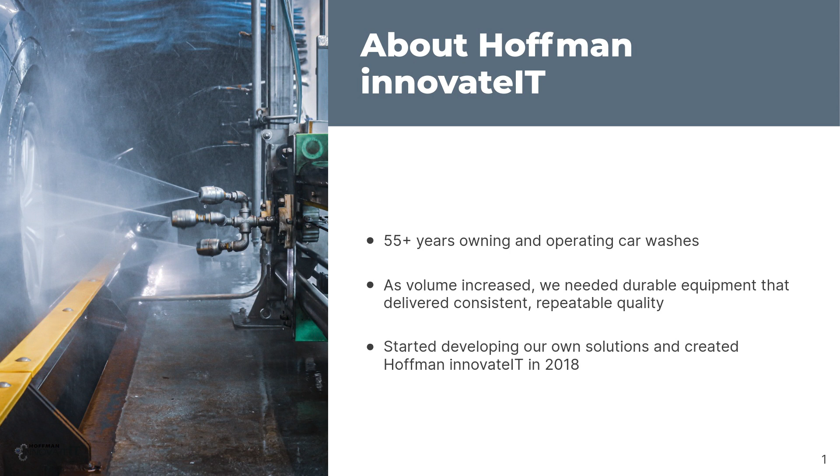With that said, I'll hand things over to Gavin, who will now take you through reclaim systems and some of the benefits and features of our reclaim system as well. Gavin, the floor is yours. Sure. First of all, just to reiterate, thanks for everybody joining here. So hopefully we'll all learn something together and point in the right direction on reclaim usage.

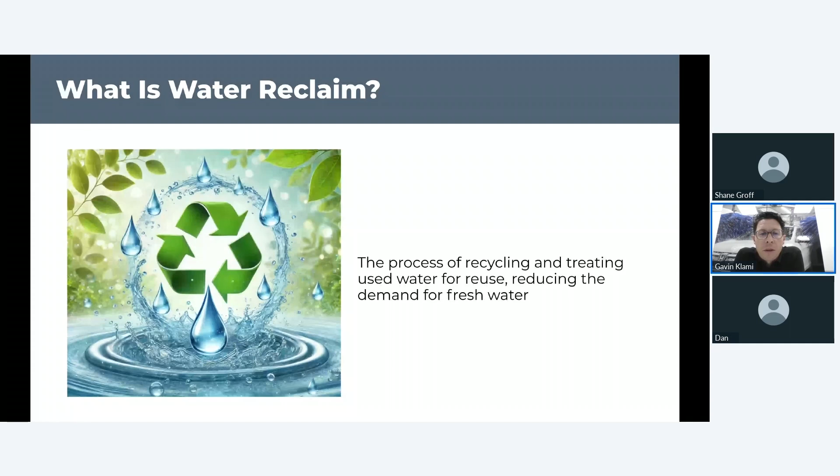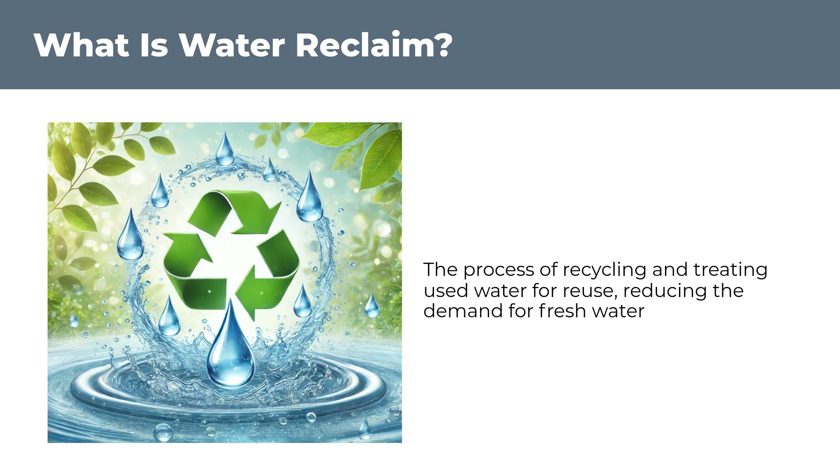So very basic fundamentals. What is reclaim water? Ultimately, treating and prepping used water within your car wash to be able to be used again somewhere else in your wash operations. So there's multiple things that go into that. We'll step through the equipment, how it actually functions, but on a very fundamental level, it's recycling your used wastewater. Instead of sending it all down the sewer, we're going to reclaim some of that, send it back to the car wash. Core reasons why we're looking to reclaim water in your wash.

Sustainability, obviously, that's something that's more and more on the front of everybody's minds, both operators and your customers as well. Depending on your municipality or location, that might be a more forced objective for you. But either way, it's something that really is coming to the forefront in all car wash operations. Obviously, water usage is a huge driver in the car wash world, so trying to minimize that is better for everyone. So sustainability, using less water is really the name of the game there.

Ultimately, from a business operation standpoint, we're looking to save you money. At the end of the day, this is a business. You're all running your businesses in a way to satisfy your customers, but also to maximize your own profits within that organization. And part of that is to cut down on your costs, cut down on the materials required to produce a high quality wash for your customers, and ultimately put some savings in your pocket, in your business, to be reinvested and ultimately serve your customers in a better way.

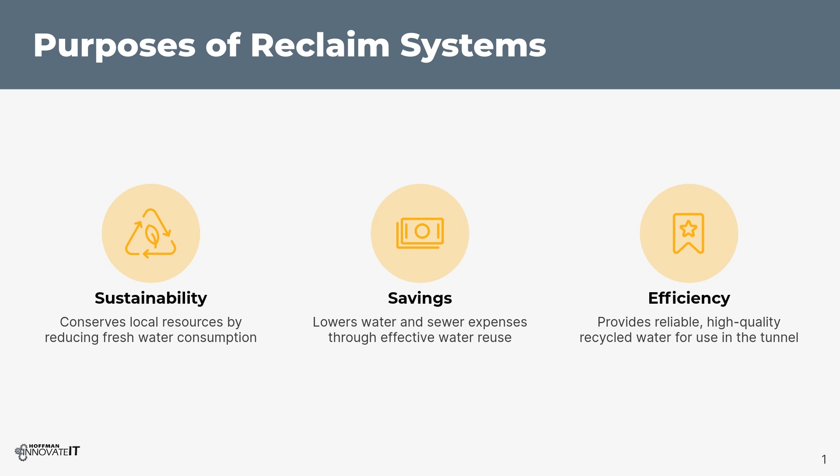And then the efficiency. For our system, it's really about providing the water when you need it, where you need it, how you need it, and making sure that it's prepped and ready to use in the most efficient way possible. So this is kind of the core way the system functions and the steps in which the water travels here through our reclaim system.

So first of all is the collection process. You all have some sort of a pit system under your wash. We're going to collect that used wash water, however it's draining down there. We're going to either go around the horn here, or we're also going to have a loop here for recirculation. So part of the control of reclaim and making sure that that water is ready to be used again is recirculation and keeping the water moving.

Just like any place that water is collecting in the world, whether it's a stream or a swamp or a bucket of water in your backyard, stagnant water allows things to grow and ultimately becomes an odor and bacteria issue. So when our system is not producing filtered water for your wash, part of the time it will be in a recirculation mode. So there's a separate outlet that comes off the reclaim system. It does not filter the water. It simply pulls the water up from the pit and sends it outbound to be used in a recirculation loop.

We generally tell people to send that down into their conveyor pit. You can use it for underbelt cleaning. You can set it up in that way. You can use it creatively to kind of wash down parts of your wash system if you need to. But ultimately, it's to get that whole water loop in your system moving and breathing. The more that happens, the more oxygen gets into the water. And that's just a very natural, easy way to control some of the odor and bacteria growth within your system.

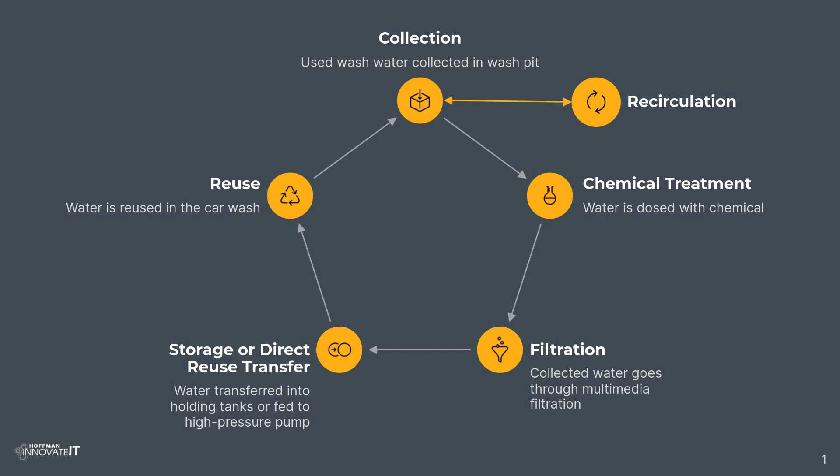We'll go over some applications of where you can be using reclaim, and then the system starts all over. It goes back down to the collection pits, filters back through the system, and around it goes.

So the real question for some of you is maybe where would you use reclaim? Ultimately, these 6 options here are just that. They're options. So the actual places you're going to use reclaim in your system depend a lot on how you're running your business, how you're running your wash, whether or not you have a need in a certain area or not.

So pretty much straightforward from the top there. Prep wash, prep gun, that initial removal of heavy debris off of the car is one way you could be using it. Friction materials, another option. Sending it to your actual friction materials, your mitters, top brushes, wraps, things of that nature, rockers, Van Hys. That's another option.

For us, the largest one is that next point there, high pressure cleaning. We'll go over this also as well, but using a high pressure nozzle array to really remove that heavy debris off the cars before you get into your friction material, we feel is a very good use of the reclaimed water.

Wheels and tires, obviously a lot of attention is paid to in the washes and by customers on wheels and tires. So getting as much volume and high pressure water as you can out of those wheels and tires really ensures that you're putting out a top quality product and wash for your customers. In order to do that, you need a lot of water. In order to do that efficiently and economically, reclaimed water is a great application for that.

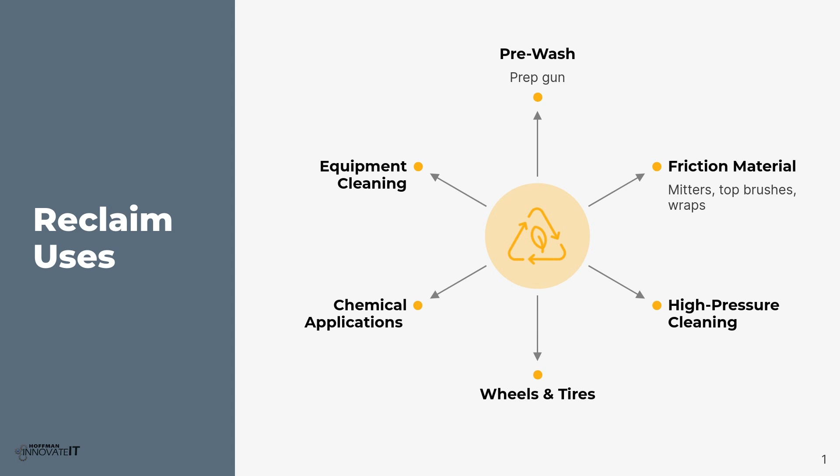And then equipment cleaning also. So again, on that recirculation, you could use that for under belt cleaning, things of that nature, but also tunnel prep and things of that nature. You could use that through prep gun or something similar for ultimately washing down tunnels and things of that nature as well.

And then you're going to have some underground storage tanks. Those might be under your back room, under your wash. They might be external. They might be underneath the parking lot. But ultimately, you're going to feed all that drain water out of the tunnel to your first settlement tank.

Generally, a lot of you are using a 3-tank system. You can go from tank 1, heavy settlement tank, tank 2, fine settlement tank, then into your clarification tank or tank 3. That's where we're going to have our pump pulling up the water, where the least amount of settlement is present. And then obviously you're going to have an overflow from that for anything that's not reclaimed out to your water oil separator and ultimately out the sewer.

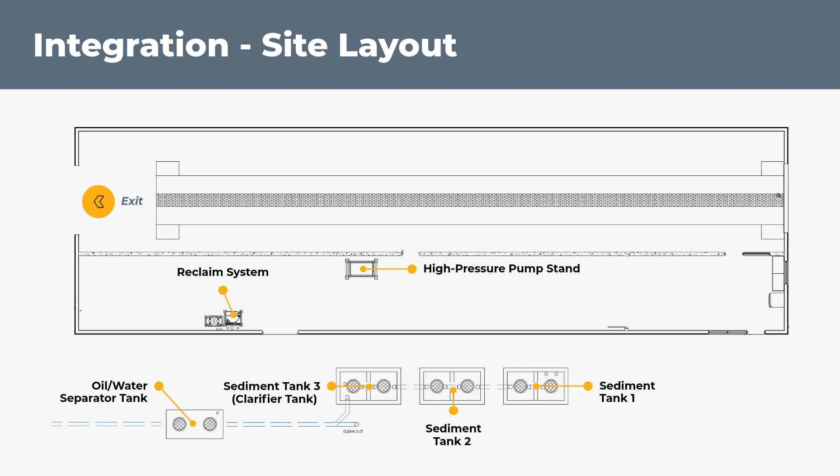And again, you can lay this out quite a number of ways depending on what your actual site is laid out like. This just gives you another view of the settlement tanks themselves. Again, kind of working backwards almost here. We have that third sediment tank. That's going to be your clarifying tank. You might have a separator in it, you might not, but that's where we're going to put our Grundfos grinder pump. This is a heavy-duty, built tough sewage grinding pump.

So it is meant and designed to live in a harsh environment and produce water upstream for years to come. And previous to getting to that tank, you're going to have your sediment tank 2. Again, this is where your fine settlement is going to be done. And in this tank, the piece of equipment we provide for you is the micro bubbler. So you can think of it as a giant aquarium aerator, essentially. You're going to feed an air line to that off your shop air supply.

And what that's going to do is really oxygenate the water. So another way that odor is controlled is by oxygenating the water, making sure that the water is not dying and decaying in that manner. And so we're going to suspend that bubbler in the middle of that tank, essentially, so we're not stirring up too much of that settlement that's happening in the tank and just providing the maximum amount of aeration we can to the actual reclaimed water.

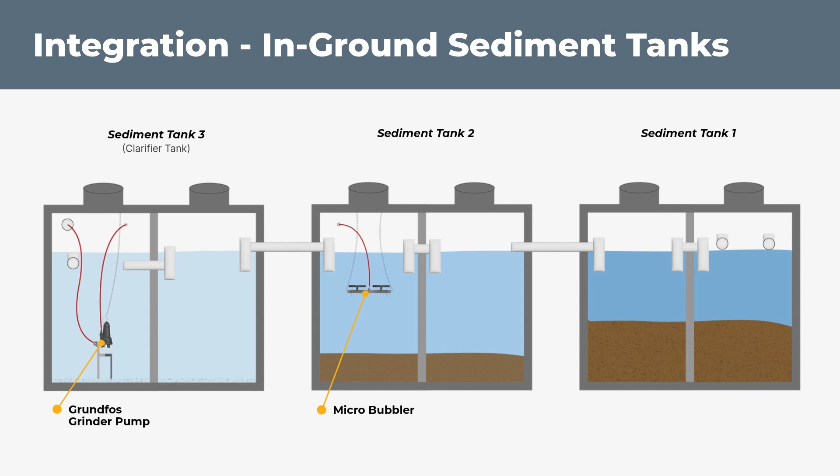And then sediment tank 1 is ultimately where the reclaim is coming in or where the used water is coming into the tunnel. And that's where you're going to go in and start the whole process from the settlement. And again, just a further clarification on the tanks here. Sediment tank 1, that's your initial collection. That's where everything from the wash is flowing into, gets heavy stuff out. Sediment tank 2, that's a remover of your finer particles. Also where we have the micro bubbler for aeration.

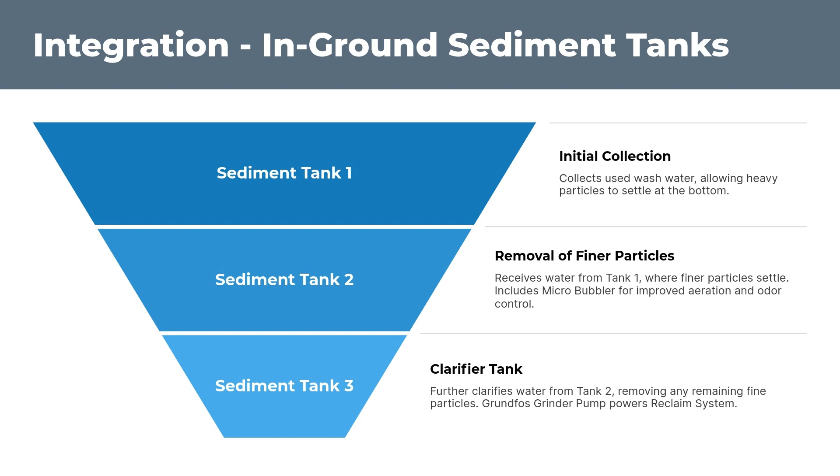And then that final tank, that's where we're really going to have pretty clarified water at that point in terms of settlement. We're going to remove the very last fine particles from settlement, and that's where our Grundfos grinder pump is. The Grundfos pump is actually supplied to you on a small stand. It's about 18 inches tall. Keeps that pump up out of the very bottom of the tank. Depending on how often you're pumping out your tanks, we just want to make sure we keep the Grundfos pump up out of any settlement that could happen. It just prevents us from having to filter all of that stuff out in the filters.

Quick system comparison. Left column here is our typical systems you might see in some of our competitors, and where we've taken our approach, which might be a little bit different. So process pump, a lot of the typical systems use a surface mount suction pump. We're using a submersible grinder pump. So again, our pump is not only providing the power to flow the water through the system, but it's also grinding up, chopping up anything that might be within that system.

So if that's leaves, small debris, small fingers off of a wrap, foam, things of that nature, it really does an amazing job of grinding that stuff up and making sure that it's not too large of an object downstream that could cause an issue. It's a macerating pump, so it's very strong. The only time we've seen any issues with them in terms of sucking something up that it shouldn't is a piece of rebar from when a tank was initially poured, and a cutting of rebar got up into the pump. Beyond that, it's going to chop up whatever you send its way.

The suction pumps can have issues up top with holding in material that they shouldn't have. They often have a strainer basket as well to protect them some, so they can just be a little bit more maintenance prone, we find. In terms of filtration systems, typical systems are going to use a filter basket, generally a cyclonic setup, potentially a biologic filter or a sand filter. All of those are pretty maintenance prone items, especially daily maintenance, like things on a filter basket. Cyclonics are going to have issues not filtering those neutrally buoyant particles.

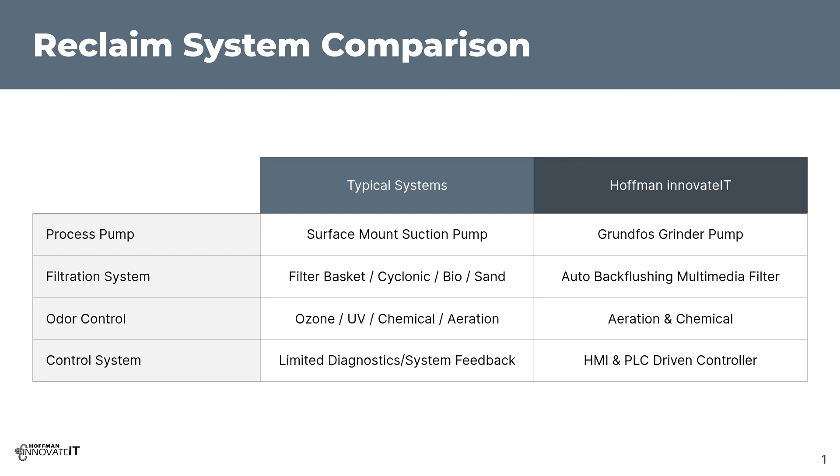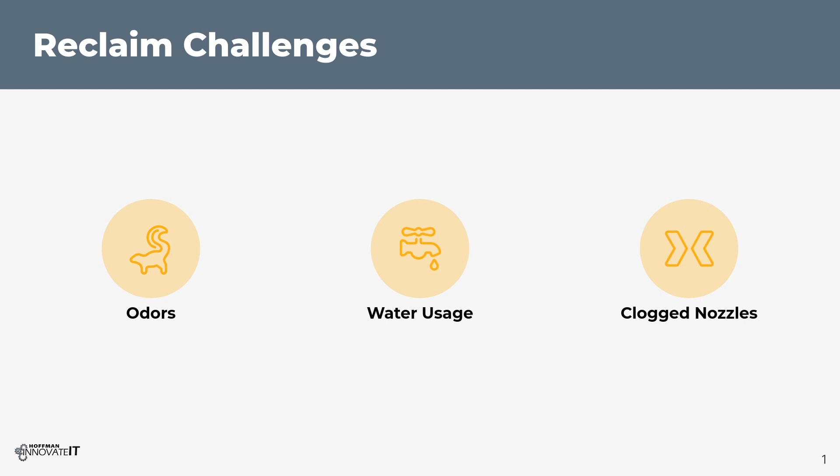In the world of reclaim, obviously you're trying to save water, save money, but with anything, there's challenges that come along with something good. So for us, really the things we're after here are odors, water usage, and clogged nozzles. That's really what your problems are going to be and what you're going to be tuning the system around to try to address. So I'll go over how we might address some of those here.

So for odors, big thing for us is adjustable dosing. So there's a chemical dosing pump right on the machine, another high quality Grundfos item. Ultimately, it allows you to dose the chemical based on what you're trying to control the odor of and what type of chemical you happen to be dosing with. So it's a pretty open-ended system. We do provide a solution for the chemical dosing, but if you have another chemical you want to use, that's also plausible. Our machine will accept it just fine.

And it allows you to dose differently maybe during your recirculation process than you do during your filtration process. It will allow you to quickly make edits and changes. Again, you might be able to reduce your dosing in your cooler months where you're not getting as much growth in your reclaim pits. All very intuitive, all very easy, all right on the HMI, but it allows you to drive the system however you want and really optimize your savings when it comes to that stuff.

Water usage. So high efficiency production. We make a standard flow and a high flow system, and ultimately it allows you to make reclaim water when you need reclaim water. So we're not making it at a consistent rate so that you need to make it all day long, like maybe a small RO system, and then tank that. With a high volume system, it allows you to make the reclaim when you need it and store it in a very small storage area, or again, direct to the pump if you want to do that.

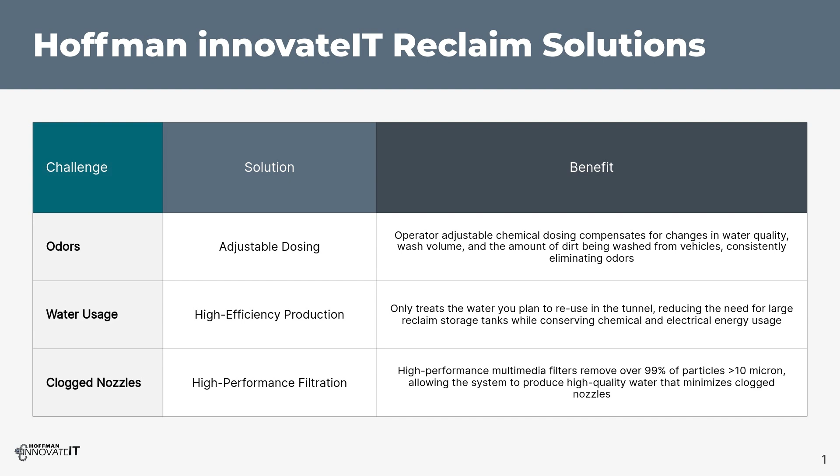Again, there's no point in using reclaim if you're going to clog your system where you're putting the reclaim through, and then you're not washing cars efficiently at all. So for us, we've really found that media blend we're currently using does a great job of removing all of those particles and allows that highly filtered water through downstream so that it can be used efficiently and consistently in your wash process.

And then we'll kick it over to Shane here. Shane will review the financial side of the system as well. So Shane, all yours. Good afternoon. Thanks, Gavin, for the recap of how our system was engineered and designed to work. So as Gavin mentioned, everyone, there's several reasons we're all doing this. Environmental concerns and, of course, financial concerns. So looking at this piece of equipment,

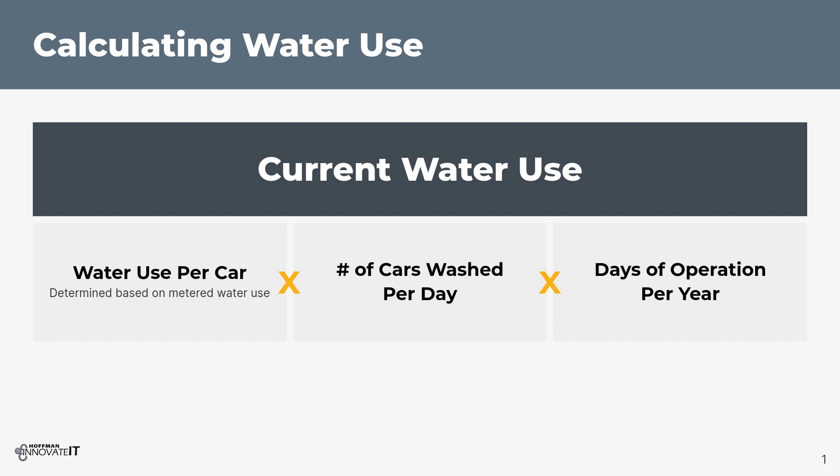solely from the financial side of things, we've gathered some data from our washes, where we're fortunate that we can share our water and sewer bills within our company and share some real world data points with you. Just simple things like calculating your water usage. We're going to look at how much water you're using per car, how many cars you're going to wash a day, and your days of operation per year. Just simple basic math, but sometimes we do have to review this. We prefer to do it both off the water meter and off our water and sewer bills.

If you've been in some of our previous webinars and pitch sessions at the shows, that high pressure cleaning is what we refer to often as our prepless model. That is in lieu of employees standing there with high pressure wands, prepping the cars as they're entering the car wash. Then we have our first rinses. Then we have our wax and sealers, and then of course our final rinse. And that final rinse at our washes is our spot-free water, reverse osmosis.

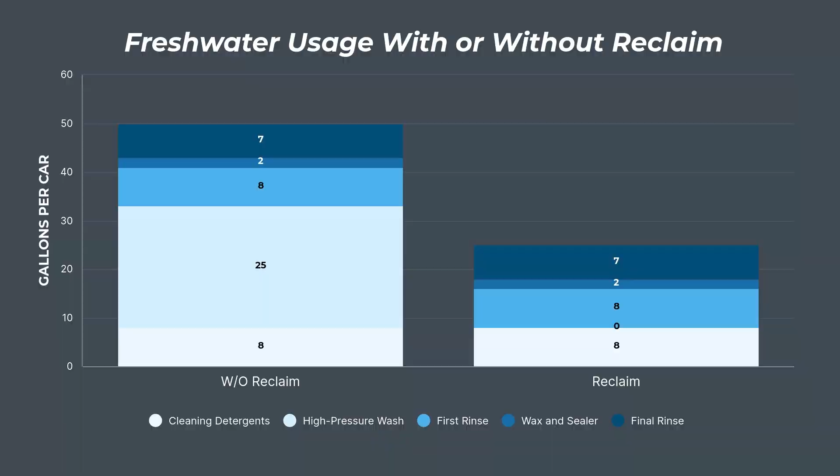So now I'll break that down into the equipment we're using it on. So many of you might be familiar with our oscillating high pressure blastIT arch. It runs 0-degree nozzles that are aerating. Most common configuration is 45 nozzles. We also have one that has 81 nozzles on it. And then we even have a couple customers that run a dual basket, which adds 9 more, so they have 90 nozzles. So you start adding those nozzles up, typically 750, 800 PSI, you're talking about a gallon a minute per nozzle. So depending on how fast you're running your conveyor, typically we're washing 3 cars a minute, so if you have 45 nozzles, right there's 15 gallons a car.

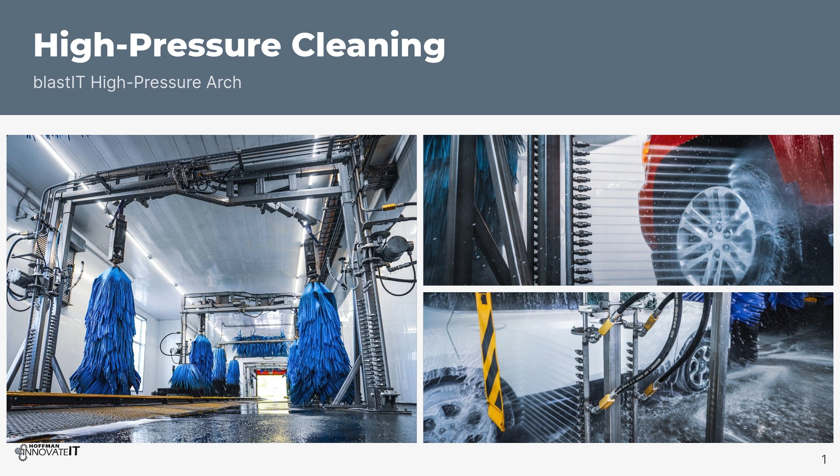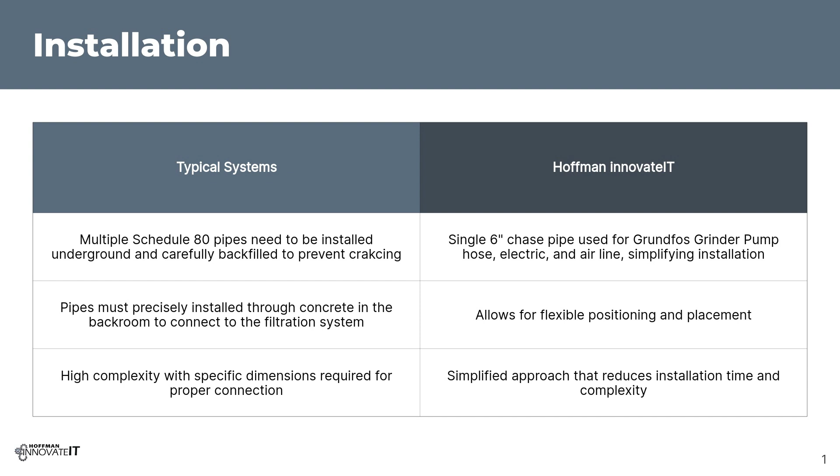So on a high flow setup where you have a $46,000 piece of equipment, 6 to 8 on top of it, let's just round it up. Say you're at $55,000 on a slow store with very cheap water. You're just at a 2.5 year payback. At a high volume store with cheap water, you're paying for the piece of equipment in less than a year.

So much like Gavin said, his objective as the engineering team putting this equipment out was, once you get it set, there's no daily, weekly maintenance, but as you can see from the numbers, of course, there's daily, weekly, monthly, yearly savings. And as we move further down the deployment schedule of this piece of equipment, we've been commercially selling it now for, at NRCC, it will be 2 years. The prototypes have been out there longer.